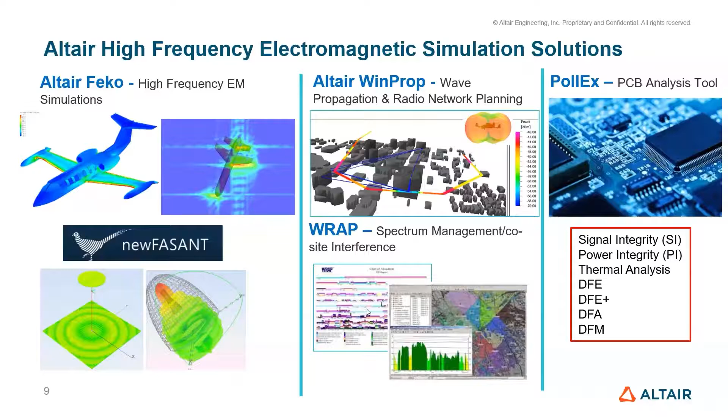In a nutshell, you can see here how the graphical FEKO launcher looks. Earlier we used to have only FEKO and WinProp. Now we have newFASANT and WRAP as well, everything is there in one bunch, and you can launch any of the applications to solve antenna design modeling through to coverage and radar coverage analysis and network planning applications. Simple problems to any complex EM problem can easily be solved using the spectrum of tools we've got in the Altair EMAG portfolio.

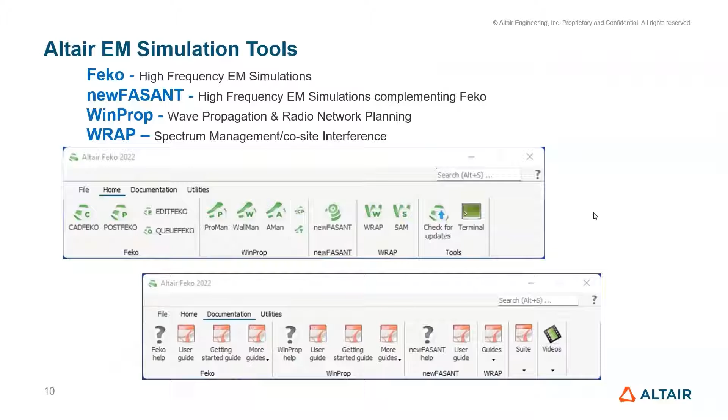You can also find all the documentation for these tools in this particular launcher. Even as I mentioned, when I joined I used to have only FEKO and WinProp, but it's no longer the same - we've strengthened our portfolio. Now let me jump onto the next slide.

Here I have Altair FEKO. Let me first talk about this particular FEKO tool - just an introduction, since most of you folks are already aware of it. We have the broadest range of solver technologies available to solve electromagnetic problems.

You can see here, method of moments is there, FEM is there, FDTD is there. Similarly we have asymptotic solvers like PO and RL-GO, and UTD is there. We also recently added faceted UTD in the asymptotic solvers. Similarly, we added an adaptive cross approximation solver in full wave methods. Apart from that, we also have the strongest MLFMM in full wave methods where we can solve problems, and we can hybridize these solvers appropriately to solve electrically large problems.

Like assuming you take an aircraft and place an antenna on it - you would like to solve that kind of problem.

That kind of problems can be easily solved using this spectrum of solvers or the solver technology. Any simple antenna can be designed, or a complex model like an MRI application. You can see a human head on the right side. Yes, even that can be solved. You can see complex materials with electrical size, hybridized to solve large and complex problems. That is the strength of FEKO.

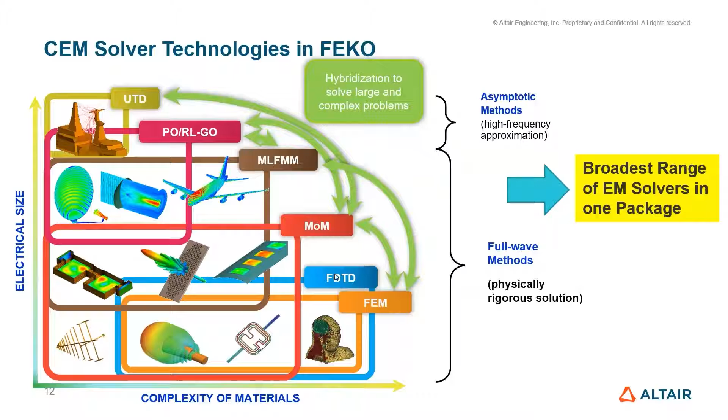I can strongly say this is one of the biggest strong points of FEKO, where you can solve a wide range of problems using solver technologies. As I told you, simple problems like antennas and array antennas can be easily solved. You can see the frequencies, 110 megahertz to 1 gigahertz, and also 1.62 gigahertz. Some radiation patterns, reflection coefficients, and impedance parameters are shown in this problem, which we solved using method of moments and MLFMM.

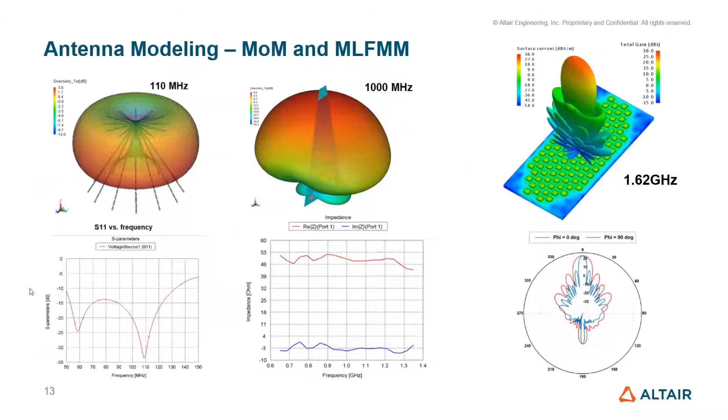FEKO is very strong at solving antenna placement problems using these technologies. I took various platforms here: a Jeep, to cater to the needs of automobile applications, and also aerospace, including aircraft, a satellite, and a naval application. It doesn't matter what application you are using, we can solve that particular problem.

You can see the radiation patterns. With the Jeep automobile vehicle, we kept a monopole antenna and computed the radiation patterns at 150 megahertz, and similarly at 1 gigahertz using the solvers available in FEKO. Similarly, we solved the problem at 120 megahertz and at 1 gigahertz for the aircraft application, where we kept the antenna on the aircraft.

For the naval application, with a ship sailing on the sea, we solved for the radiation patterns and surface currents. Especially here, we solved for the surface currents, and you can see we got it at 100 megahertz. Also, a satellite, which is radiating at 1.62 gigahertz.

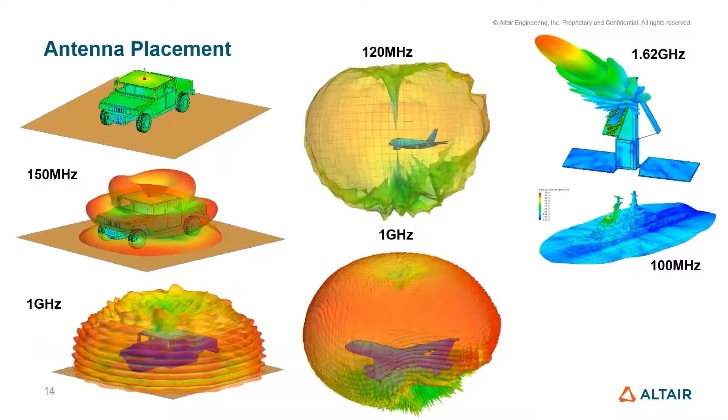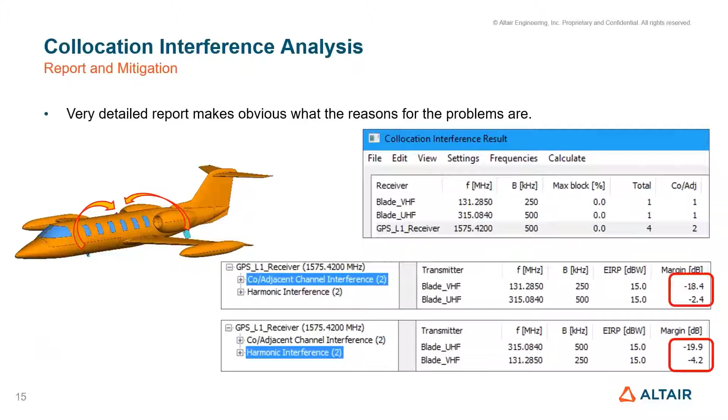Let me jump to the next. One more strong thing we can do is co-location interference analysis. You can do any co-site interference analysis, placing many antennas on top of the aircraft and computing the co-location interference. We have a nice interface between FEKO and WRAP to solve that problem. Using a very detailed report, you can get all the coupling values as S-parameters from FEKO, take them to WRAP, and get a nice co-location interference analysis.

You can see the wide variety of applications that can be accomplished using the FEKO software: simple antenna design to antenna placement, as we saw in the earlier slide, then electromagnetic compatibility studies, scattering or radar cross section, and others. We also have a wide variety of multi-physics analysis and optimization.

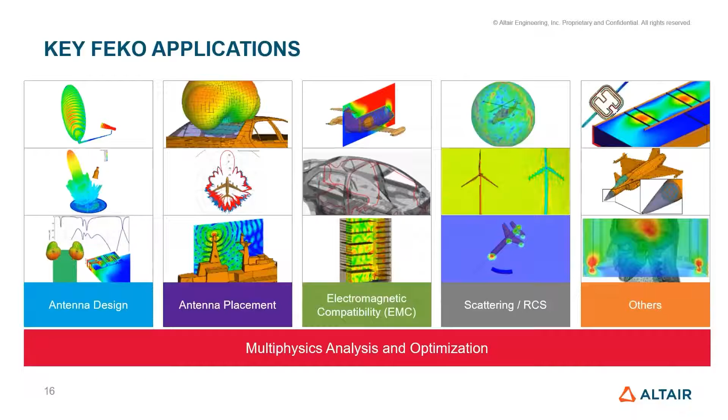Let me jump to the next tool: Altair newFASANT. newFASANT complements FEKO. As I mentioned, most of the solvers available in FEKO are available in Newfasant. The additional advantage is that we have some asymptotic solvers available in Newfasant, like GTD and hybridization of GTD. Among the hybridized solvers, hybridization is possible, and among asymptotic solvers, that is possible as well in Newfasant.

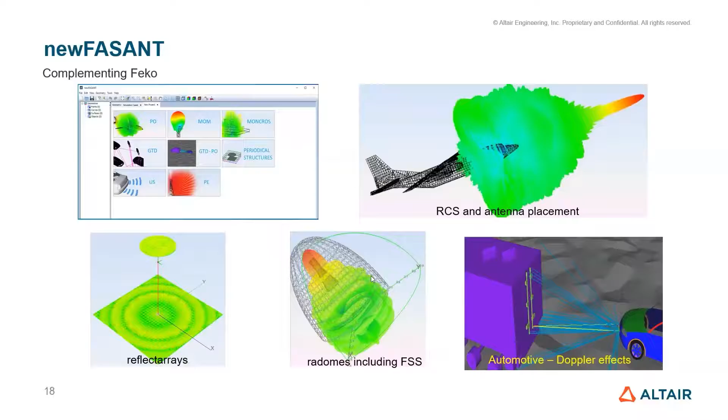Then WinProp. WinProp considers the large environment for antenna patterns computed in FEKO. As I told you, from a simple house example to rural or suburban scenarios. In case you want to perform radar coverage analysis or any network planning, WinProp is the best bet. You can solve indoor scenarios, suburban scenarios, rural scenarios, or urban scenarios. All these things can be solved using WinProp. You can also consider topography and clutter without individual buildings for rural or suburban scenarios in WinProp.

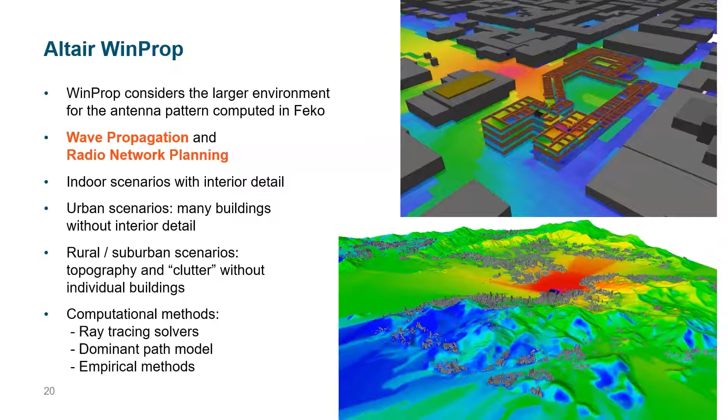The computational methods you see here are ray tracing solvers, dominant path model, and empirical methods. You can see propagation models for various scenarios in WinProp: topo data, rural propagation, urban propagation, and indoor propagation. We took 3 different scenarios, and the propagation models used to solve for coverage analysis are shown here: 3D standard ray tracing, 3D intelligent ray tracing, 3D ray tracing, appropriately for rural propagation, urban propagation, and indoor propagation.

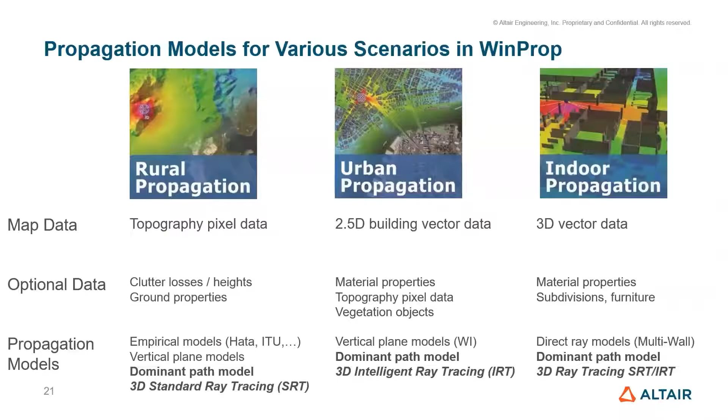Okay folks, you can get the model, you can get the map data from different fashions. It might be a street map, or it might be USGS, etc. We have all the capabilities and nuts and bolts to address or import those maps into WinProp.

The applications you can see here: radio coverage and radio channel modeling, deployment and optimization of radio networks, virtual drive tests for ADAS applications and antenna performance analysis, coexistence of radio networks, and electromagnetic exposure. These are all the WinProp applications we'll discuss in the next couple of slides, but it can cater to a wide variety of needs.

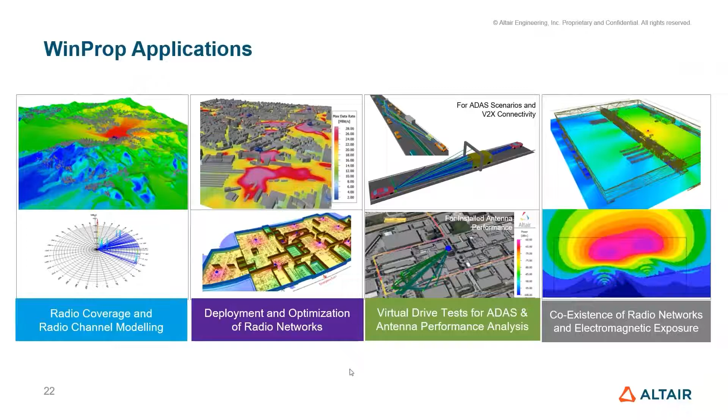We do have propagation models for various scenarios in WinProp. You can see here: indoor scenario, urban scenario, rural scenario, and tunnel scenario. These are the coverage plots, and also a drive scenario, which you can call a virtual drive test. We are able to get all these particular things done using WinProp. Some of the results that we obtained from WinProp.

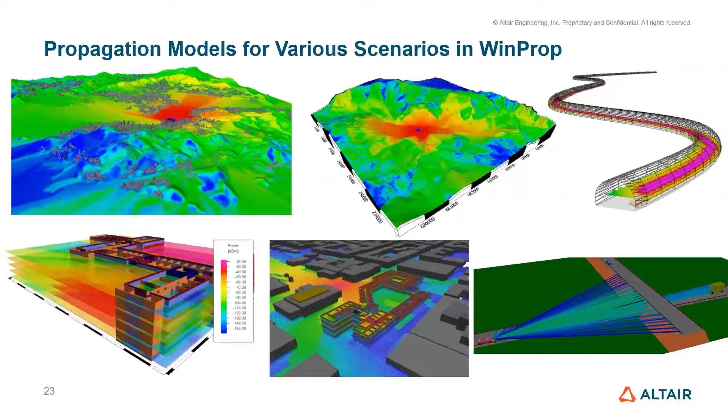Virtual flight test, large scale terrain scenario, virtual flight and drive test in large scale topographical or clutter scenario, define 3D trajectory and aircraft orientation, pitch or roll. You can see here, assuming that an aircraft is flying over a platform, it might be a city environment, rural environment, or suburban environment. You can consider the flight path tagged with an antenna and study the coverage analysis. You can define the 3D trajectory and aircraft orientation, and get the received power levels appropriately and coverage range along the trajectory. We can use these propagation models to solve the problem, like Longley Rice and dominant path model.

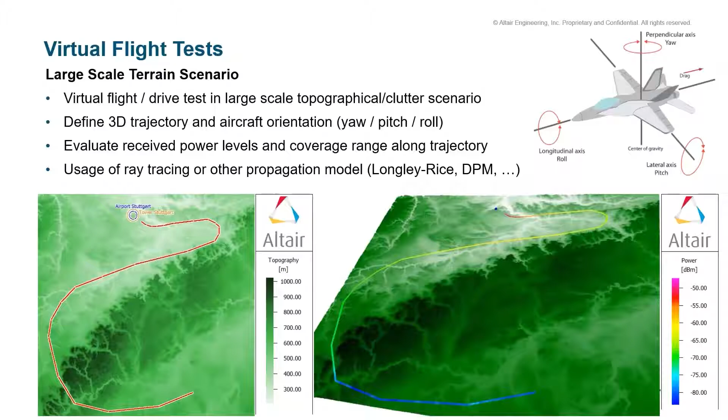Okay folks, not only that, we can also do network planning using WinProp. Network planning on system level, including beam forming, envelope beam pattern with static load per cell, Monte Carlo simulation with individual beam assignment. We can get all the data rates and signal to noise ratios, as well as data throughputs. All these things can be applied using network planning.

We do have very nice air interface files that are available preloaded. Also, if you want to have your own defined air interface for your network planning, yes, WinProp supports that particular thing as well.

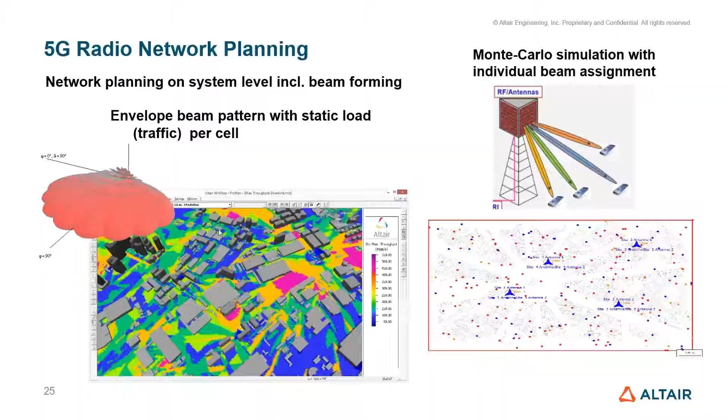Yes, we are done with suburban rural scenarios, but in case if you want to study coverage analysis for a bigger scenario like provinces and countries, yes, we do have one more tool in the Altair portfolio. What is that called? WRAP.

With WRAP, you can see simulations at the level of provinces and countries, terrain and clutter maps, usually no individual buildings, with a wide range of methods including ITU models. We can do radio and radar coverage and spectrum management at a very big level using WRAP.

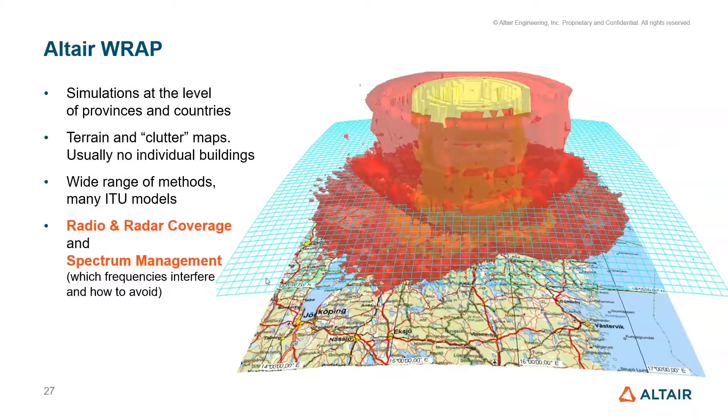Large scale radio and radar coverage, and also collocation interference, and satellite communications. You can see the pics here, how we can get the 3D plots for antenna placement for a big scenario or a coverage over a province or country.

We could also include jammers to study the radar coverage analysis inside WRAP. And this is the satellite communication, of course. You can also perform that.

It supports many ITU models to support this kind of analysis internally. You can see all the ITU models. Not only that, attenuation due to atmospheric gases can be included for terrestrial scenarios.

ITU-R P.2108, and building penetration layers can be added. There are a lot of ITU models supported in WRAP, apart from the standard COST 231 Walfisch-Ikegami, Okumura-Hata, and Longley-Rice models.

These are the propagation models that help solve the problems to get the coverage analysis. One can use these particular things appropriately based on the needs.

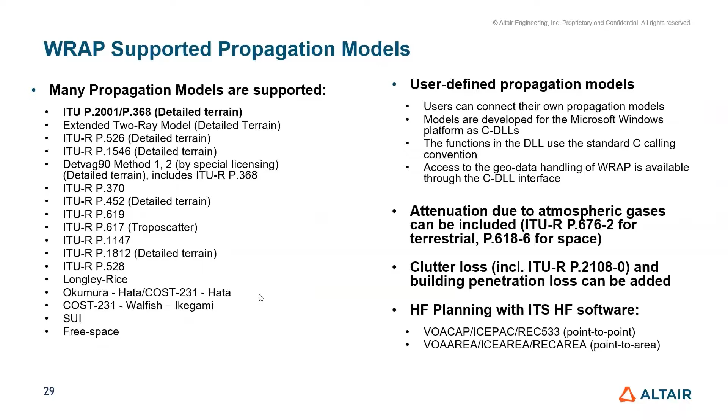Yes, simple radar coverage, radio optical visibility with user-defined targets, and also you can see jammers can be included in the analysis. That's what I was talking about.

We can get the coverage for the spectrum for the country or province, and you can include the jammers, and study the coverage analysis appropriately.

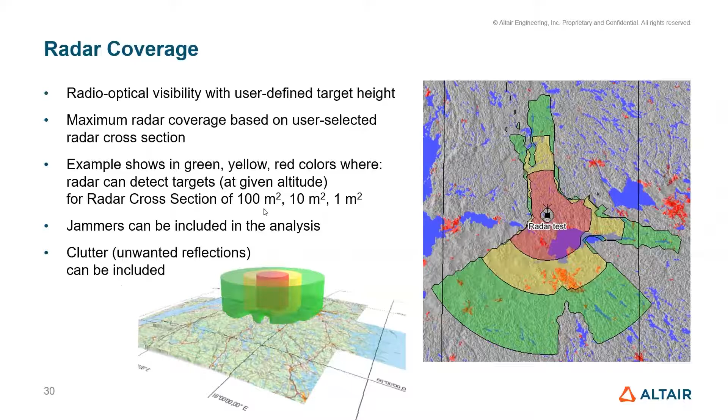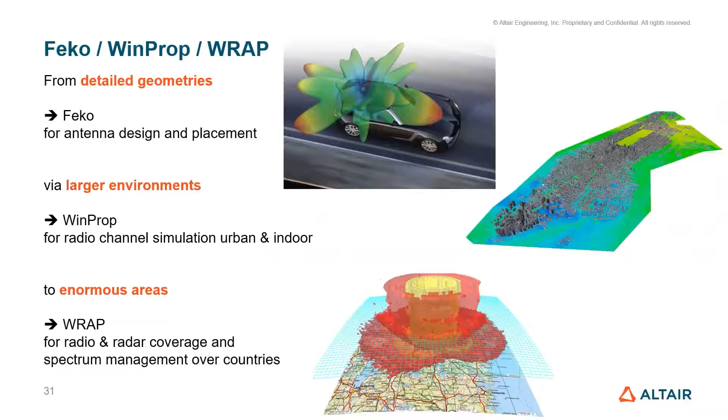So just in a nutshell, the connection between these three tools, FEKO, WinProp, and WRAP: FEKO for antenna design and placement, WinProp for radio channel simulation in urban and indoor scenarios up to very big areas, and radio/radar channel coverage and spectrum management over countries.

And last but not least, PollEx, which as I was telling you, is very good for signal integrity and power integrity analysis. In case you have any PCB that you would like to work with for signal integrity and power integrity analysis, PollEx can be your go-to tool to solve those problems.

Apart from that, we also have verification tools like electrical and manufacturing tools, which are mainly for mechanical engineers. For us, I strongly recommend that if you want to do any signal integrity and power integrity analysis, please go ahead and use PollEx.

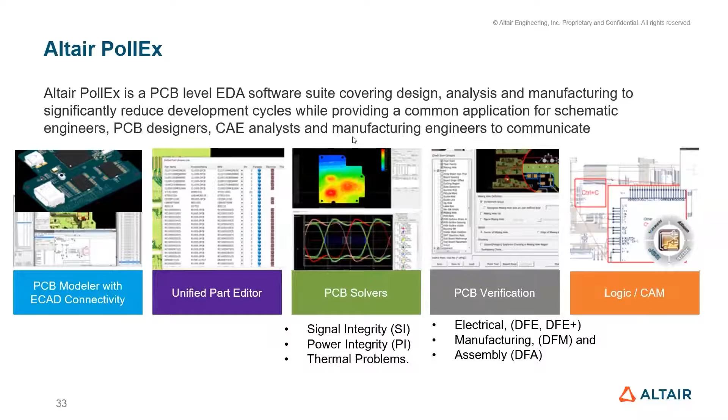Then we have the partner alliance tools, which you can also choose. There are a lot of tools for the partner alliance, 150 plus software products, and you can see here the Microwave Wizard, which is very good for passive components.

In case you would like to design any passive components, it is very easy. The GUI part is very easy, with a library of components available. You can just drag and drop into the GUI and connect them. If you are designing any feed or power dividers or something like that, the inbuilt algorithms can solve the problems in no time. The computational time is a real advantage when solving passive devices using Microwave Wizard.

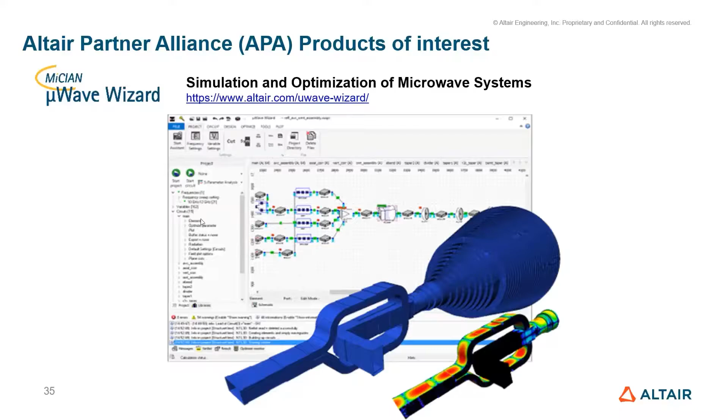Yes folks, this is the summary of the Altair FEKO tools. Thank you for your attention.